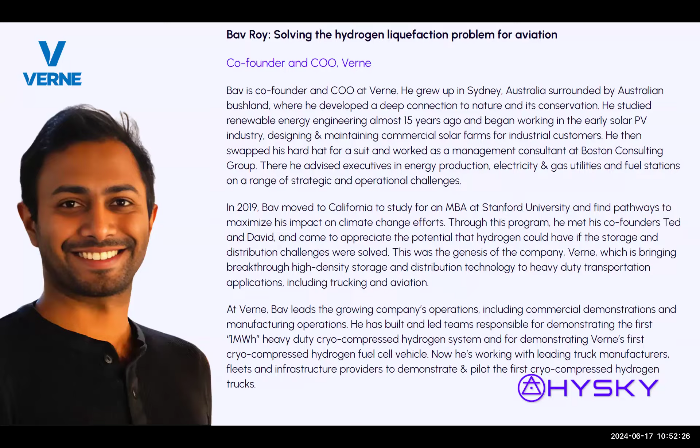Great, thank you Rishabh for the introduction. Can everyone hear me okay? Yep, thumbs up, okay great. And Danielle, congratulations on the twins, that's huge news. Thank you everyone to the HYSKY community for tuning in today.

It's a pleasure to speak with you about what Verne is working on. We're named after Jules Verne, who talked about hydrogen-powered shipping actually well over 100 years ago, so he was a bit of a visionary. But let me see if I can get my presentation sharing here.

So what Verne focuses on is high density hydrogen for heavy duty transport. A little bit about me - I lead a lot of the operations and early commercial demonstrations at Verne. Originally worked in the solar industry in Australia, then as a management consultant, before moving over to California to focus on bringing novel solutions to climate change, and saw a lot of potential for hydrogen to have a role across the landscape, but especially within transport, as I'll talk about today.

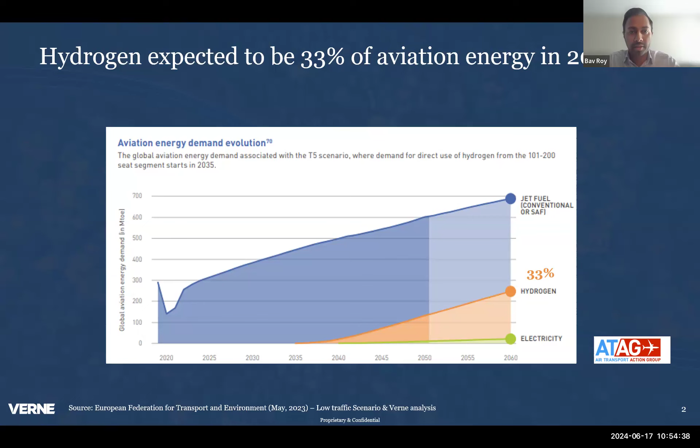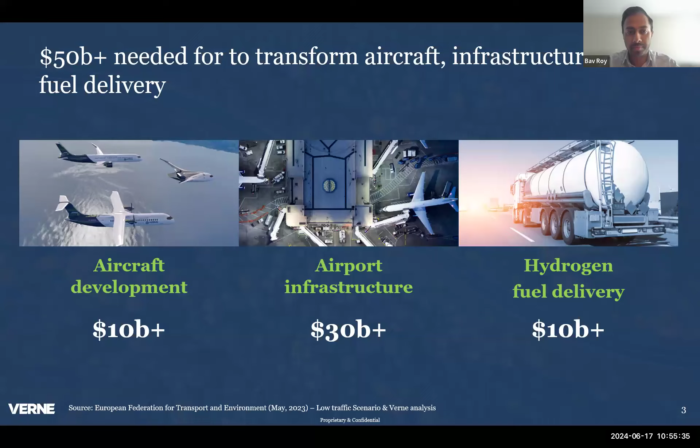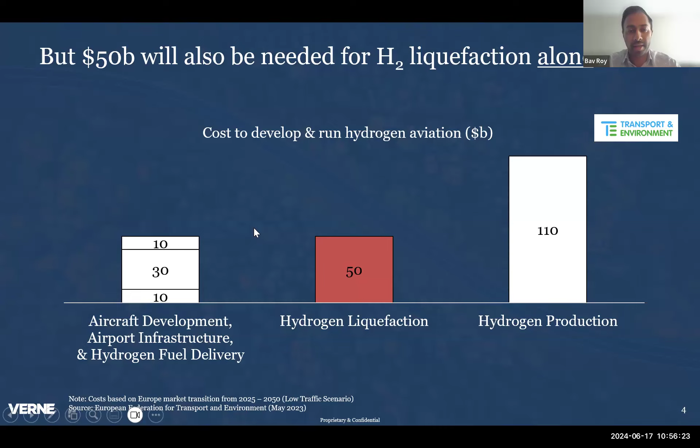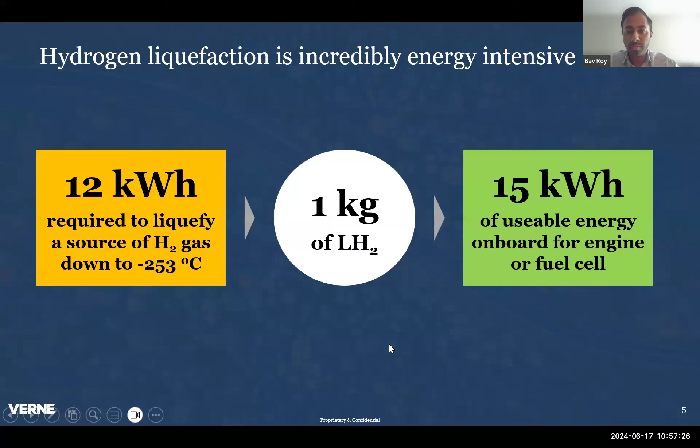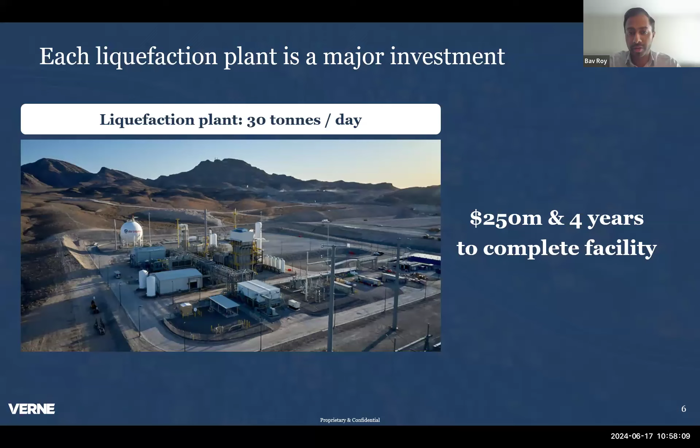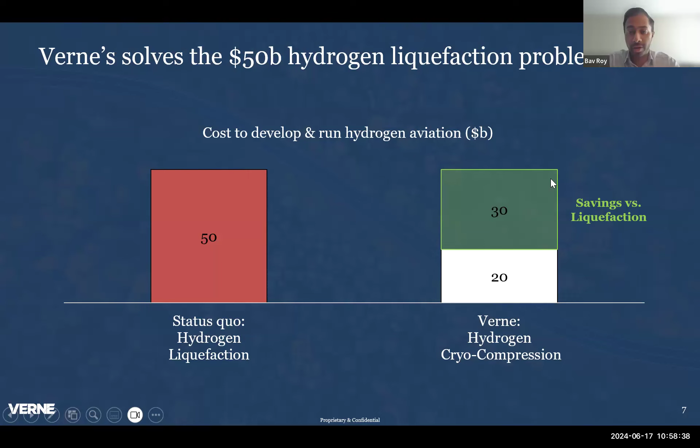So what Verne does is we solve the liquefaction problem. We think about the status quo that the industry is planning for, which is fueling aircraft using liquid hydrogen. That's going to cost about $50 billion. However, with cryo-compressed hydrogen, we can bring that cost way down to a more modest $20 billion, providing $30 billion of savings that can be used for some of the other challenges on aircraft development, infrastructure, fuel delivery, or even production.

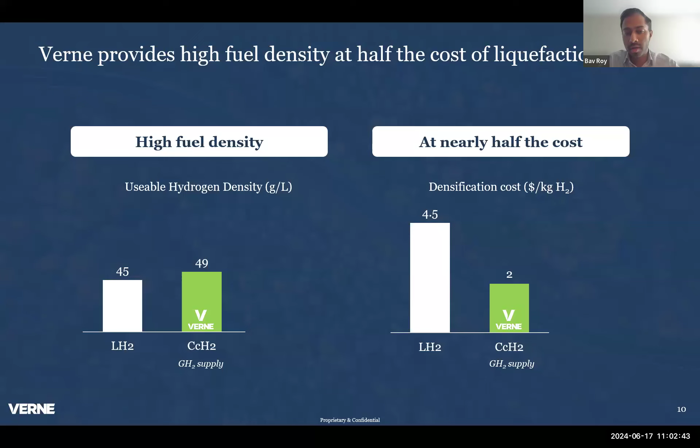But as I mentioned, you can still use the liquid hydrogen supply chain if you happen to have a great low-cost supply of liquid hydrogen. So you fill the same cryo-compressed hydrogen storage systems on board aircraft using a source of liquid hydrogen supply, and you are able to get to much higher usable densities, because that cold gas is even colder if you start from liquid hydrogen than if you start from gaseous hydrogen. So you're able to get to much higher usable densities than cryo-compressed from gas and also than liquid, but you don't get any of the fuel cost savings that you would if you skipped the liquid hydrogen supply chain.

So what this means is aircraft developers now have flexibility. They can design for cryo-compressed hydrogen storage on board, knowing that in every scenario it's going to be the highest usable density, and in supply chains that have gaseous hydrogen supply, the aircraft can benefit from lower fuel cost. And for supply chains that have liquid hydrogen supply, the aircraft can benefit from even higher usable density.

I thought I'd touch briefly on the concept of usable density, because often we hear that liquid hydrogen's actual density is 71 grams per liter. That is true for liquid hydrogen stored at 1 bar. The challenge is you can't actually store liquid hydrogen at 1 bar on vehicles. It's often stored at slightly higher pressure, and what that does is bring down the max fill density to unfortunately lower densities than 71 grams per liter.

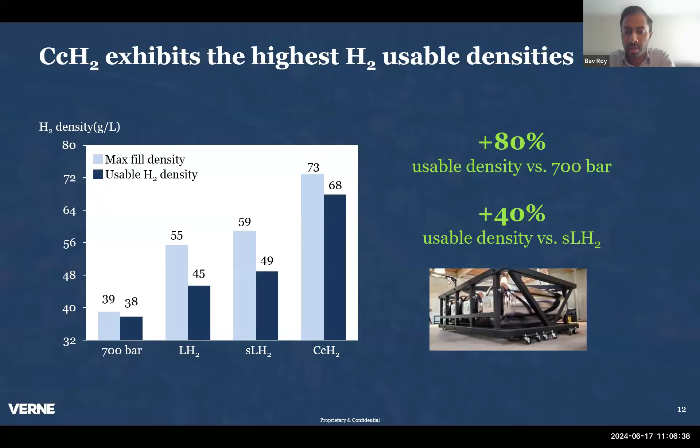So we often think about these systems as storing cold compressed gas, and that often creates the question of, well, that sounds pretty expensive. It's got to be pressure compatible, temperature compatible. However, because we're able to get to such high densities, and we're only sticking to 350 bar hydrogen, which is a lower pressure than what, say, a Toyota Mirai has today, we're actually able to get to lower storage costs than even compressed gas. We expect to get about 50% cheaper than 700 bar, simply because each storage tank has such high density that you have fewer tanks to store a given amount of hydrogen. There's less carbon fiber, less valving to store the same amount of hydrogen.

We verified this with our own internal analyses as well as some third-party analyses from Argonne National Lab and a couple others.

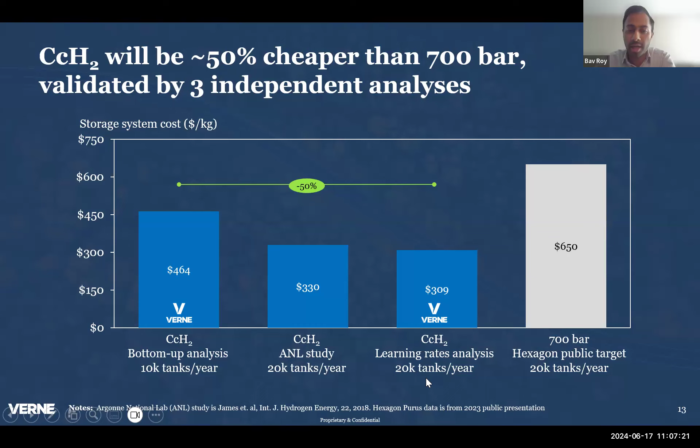So what does Verne do? We have 2 products. One is the cryocooler to compress and cool hydrogen to increase that density. Here on this pallet is a 1 ton per day cryocooler that we tested in Arvada, Colorado. And then on board vehicles, we provide the storage systems - the vessels, the control systems, the balance of plant heat exchangers to store hydrogen at that highest density. And that's all with passive insulation, so insulated storage tanks.

The benefit for aviation is that on the cryocooler side, rather than these massive liquefaction plants that will take many years and hundreds of millions of dollars to get set up, these cryocoolers can instead be deployed - they're efficient, low cost, and modular. This can be done at 1 ton per day, and it can also be scaled up. On the storage side, we've got high density, lightweight storage systems that are at supply pressure, so they're compatible with ICEs as well as with fuel cells.

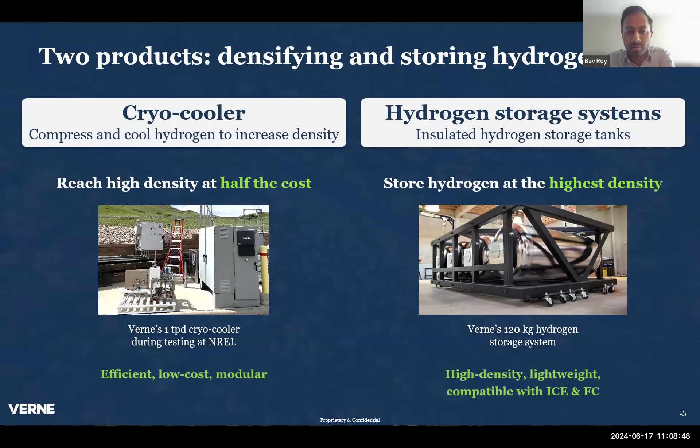So this is a new state of hydrogen, right? We've got gas, we've got liquid, and we now have cryo-compressed.

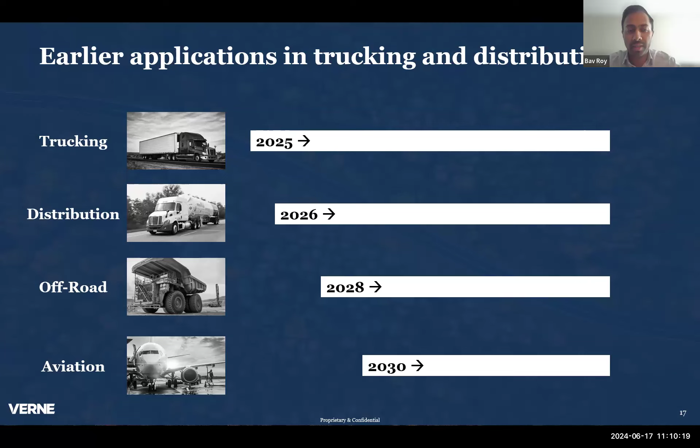So I'll now touch briefly on some of the work that we're doing in trucking and distribution, and how that leads to some benefits in aviation.

As I mentioned, two applications in the near term: trucking and hydrogen bulk distribution. For onboard storage on trucks, we're able to maximize the usable hydrogen on board. Because we're at such high density, we can store enough hydrogen exactly where the diesel tanks are on trucks today. We'll actually be demonstrating the first ever cryo-compressed hydrogen truck later this year. We've already powered a fuel cell vehicle with cryo-compressed hydrogen, and as I mentioned, we're working on powering an engine this year.

These storage systems are compatible with both liquid hydrogen and gaseous hydrogen supply, as I mentioned earlier. And that's really important for truck fleets that don't want to adopt a fuel unless they know that they'll have fuel security - that wherever their tractors go, they'll be able to actually fill up. That's one challenge that we saw with LNG in North America, and why it didn't really take off.

And then there's low boil off at both the station and vehicle side. Today the liquid hydrogen supply chain, unfortunately, just due to the tricky nature of liquid hydrogen and it needing to be stored at such cold temperatures, does suffer from a lot of boil off losses as hydrogen is produced, transferred over to trailers, and then moved from trailers to stations. With cryo-compressed hydrogen, we're able to minimize that boil off throughout the supply chain.

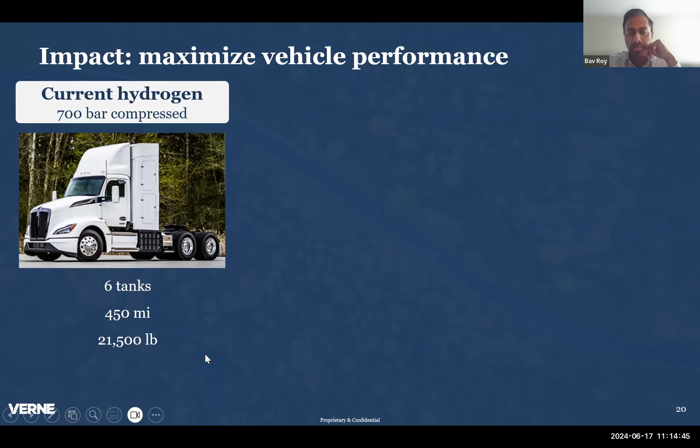For comparison, the equivalent diesel truck weighs about 16,500 pounds, so that's a meaningful hit on the payload that truck can carry, meaning less revenue for the fleets. So that's the 700 bar truck. With cryo-compressed hydrogen, we're able to provide substantial benefits to either increase the range or lightweight that truck.

Starting with a long range option, in that same region we could store four tanks to about double the hydrogen on board and double the range without impacting the weight. What that means is that can halve the infrastructure requirement for trucks, because they can always come back to fuel at their same home base.

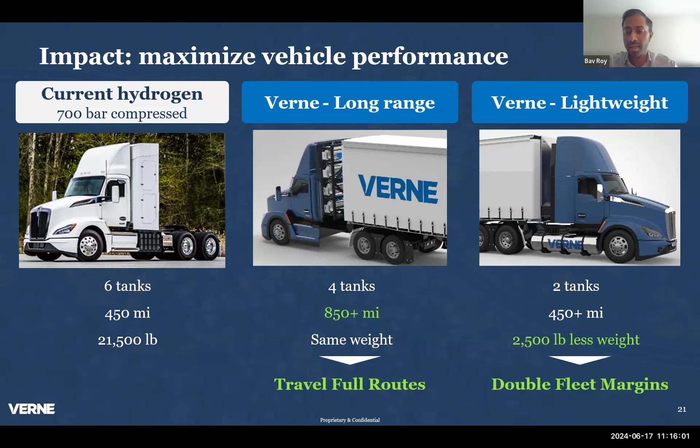And on the lightweight option, we're seeing a lot of traction for this, particularly in drayage and other applications, where we can completely avoid this backpack. Instead, store hydrogen in two saddle-mounted tanks either side, to get to at least about 450 miles or more range, whilst bringing down the weight and shortening the wheelbase of this truck. That can potentially double the fleet margins for payload-constrained fleets that already have pretty tight margins on their operations and really suffer from any hit to their payload carrying capacity.

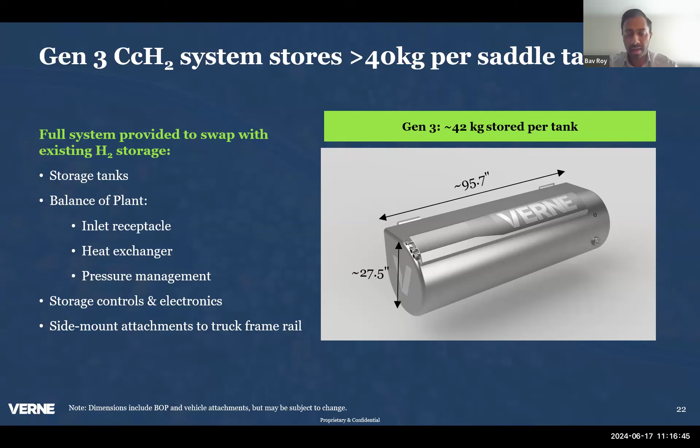So this is a 3rd-gen system that we're working on, designed to sit behind on the side of a truck. It stores about 40 kilograms, and it's designed to be a direct swap-in with existing hydrogen storage. It includes the storage vessels, the balance of plant, inlet receptacle, heat exchanger, all the pressure management equipment, as well as the controls and electronics, really to make it an easy one-for-one replacement without needing to think about what a fuel cell or engine sees, because the fuel cell or engine will see exactly what they see today with compressed gas storage on board.

So we've talked a lot about the on-vehicle side. There is an established liquid hydrogen network in North America, and we also want to maximize our compatibility with that. Here, what I'm showing is the existing liquid hydrogen to compressed gas supply chain. Some of the new hydrogen stations being built will have a liquid hydrogen tank, a cryopump that essentially converts liquid hydrogen to compressed gas, then a vaporizer to heat up that cold compressed gas, buffer storage, and then a dispenser hose and nozzle to fill these compressed gas trucks.

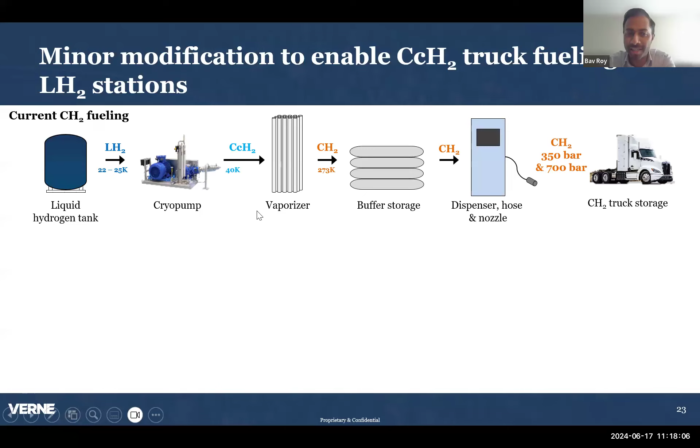And actually in this dispenser, you'll have a chiller unit to chill that hydrogen to -40 Celsius to prevent the tanks from overheating. So funny enough, in this process, you actually already get compressed hydrogen immediately after the cryopump. However, because there's been no technology to store cryo-compressed hydrogen gas, the hydrogen is heated up, and that really high density, that cold energy, is wasted. It's quite unfortunate.

So what we're doing is working with a number of station developers to ensure they can essentially dispense cryo-compressed hydrogen as well. And it's actually really easy to retrofit. You just bifurcate the line and keep that hydrogen cold out of the cryopump - it's already in the perfect state to fill these trucks. We've actually recently announced some testing we've been doing on the nozzle and hose for cryo-compressed hydrogen. So all we need to do is out of that cryopump, keep it cold as we fill these trucks.

And I guess the same thing applies for aviation, in that if, as we expect there will be, you're already planning to have at least some of this equipment, we could just reuse the same liquid hydrogen tank, same cryopump to fill these trucks, or fill cryo-compressed hydrogen for aviation.

And of course, like I mentioned, this is the liquid hydrogen side. There's of course the low cost alternative if you want to use the cryocooler to just bring down that fuel cost, by using the gaseous hydrogen supply chain and a cryocooler that will chill that pressurized hydrogen.

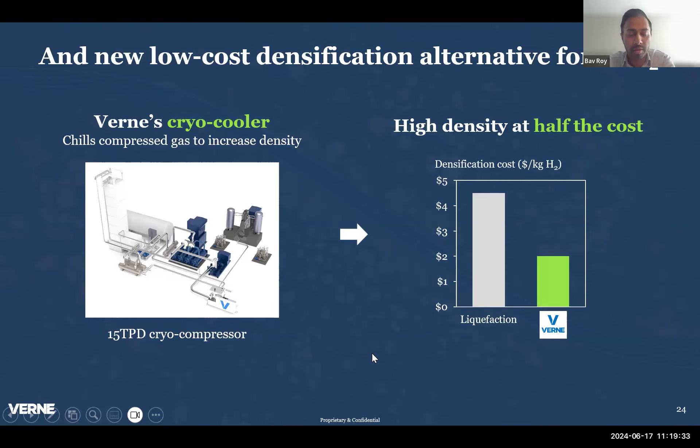So in summary, there are multiple ways to fill any sort of cryocompressed storage. You could use the liquid hydrogen supply chain and a cryopump, or the compressed gas supply chain and a cryocooler. And worst case scenario, since these are 350 bar pressure vessels, if you were stranded with no source of cryocompressed hydrogen, you could fill with 350 bar hydrogen. That's not something we'd recommend because it's not as efficient as even a standard 350 bar tank, since you'll have extra insulation and other components.

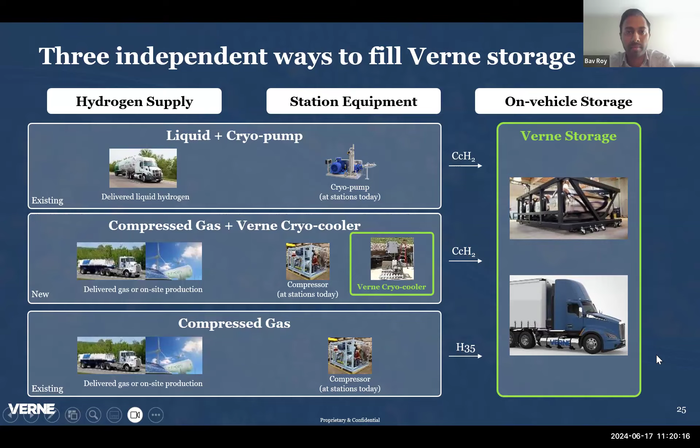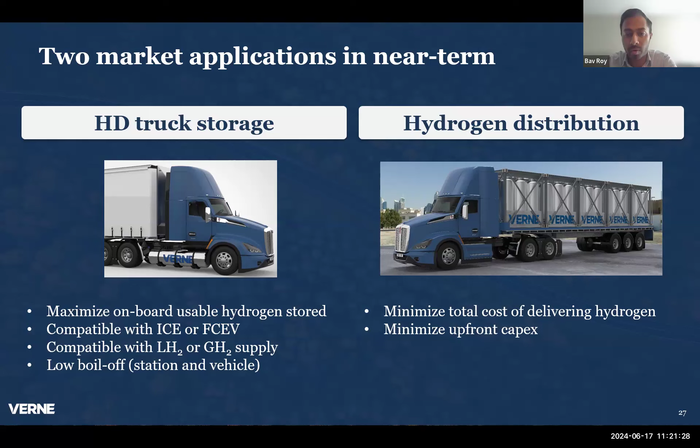So as a summary, in the near term we're mostly focused on trucking and distribution, but we're excited about how cryo-compressed hydrogen can have a role in aviation. And then on the distribution side, briefly...

What cryo-compressed hydrogen trailers can be filled by is, one, using the liquefaction plant. You've already invested in a great liquefaction plant, you can still fill these trailers using that cold compressed gas. But if you don't have a liquefaction plant, you can instead put in the cheaper compressor and cryo cooler to still fill cryo-compressed hydrogen trailers. It just won't quite be as cold as if you use the liquid supply chain.

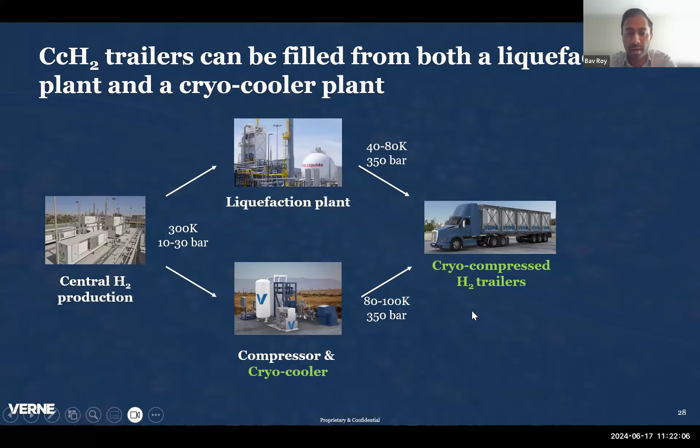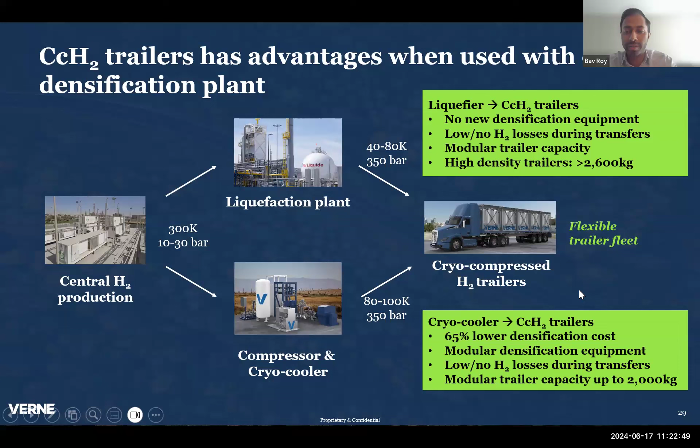And so each of these has its own benefits. Using cryo-compressed hydrogen trailers with liquid supply means you can reuse the equipment, you have a lot less losses during transfers, and it's modular trailer capacity—you don't need to just deliver one big liquid hydrogen tank, you can scale it down as required. And on the cryocooler side, as I mentioned, it's much lower densification cost. You can roll out your densification equipment in a much more modular way, and you still benefit from having low or no losses during transfers.

Okay, so just a bit about our team. You've got myself, the Chief Operating Officer, on the call. We're also led by our CEO, Ted, and our CTO, David. And then we've got some experts from the hydrogen industry. Kaushik Malik, the former CTO at Steelhead Composites, has really been a pioneer of pressure vessel technology over multiple decades. We've got Vincent Helwan, who spent decades at Air Liquide in cryogenics, and then developed a helium cryocooler at the Stanford Linear Accelerator. And recently Alex Grab has joined us from Nikola, where he developed the onboard hydrogen storage systems, and previously used to work at Luxfer.

And on our advisory board, we've got Tom Linebarger, the former CEO of Cummins, really helping us think about how we can develop a trusted brand and manufacturing process similar to what Cummins has, as well as Salvador Aceves, the original inventor of cryo-compressed hydrogen and former group leader at Lawrence Livermore National Lab, where we've done a lot of our testing to date.

We're grateful for a lot of the funding we received from Breakthrough Energy, ARPA-E, Department of Energy, and recently we got a US Army grant as well. And then private capital—we've got investments from United Airlines, Trucks, as well as Amazon and Caterpillar.

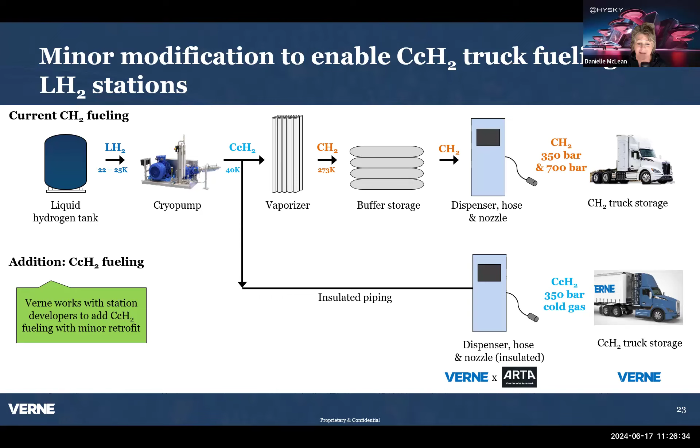I see. Well, I hope I get an invite to your demonstration. Would love to bring some aviation folks with me to see it. I think this is a game changer. Absolutely. There was one more thing I wanted to ask you, and then we'll get to the questions in the chat.

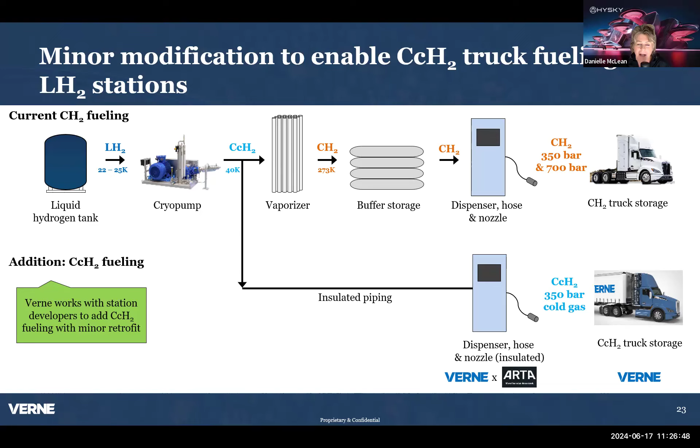But what do you say to the majority of the hydrogen aviation industry—or I guess I should say group and developers—there's a really general consensus that it has to be liquid hydrogen on board the aircraft. You explained the density of cryo-compressed. What do you say? Do you get that comment a lot? I hear it all the time. What do you say to that?

Well, I guess I would start by agreeing that it has to be really high density. That's why everyone suggests it needs to be liquid on board, because compressed gas just won't get there for aviation applications. I'd say let's look at the economics of aviation today. Fuel cost is potentially the biggest driver of the economics. If we look at the cost of liquefaction, it is going to come down, but there's going to be a limit as to how far it can come down. If it's anywhere near the cost of what it is today, I'd love to see how hydrogen aviation can be economical. So instead, what cryo-compressed can offer is slightly higher densities than liquid, without the major fuel cost penalty.

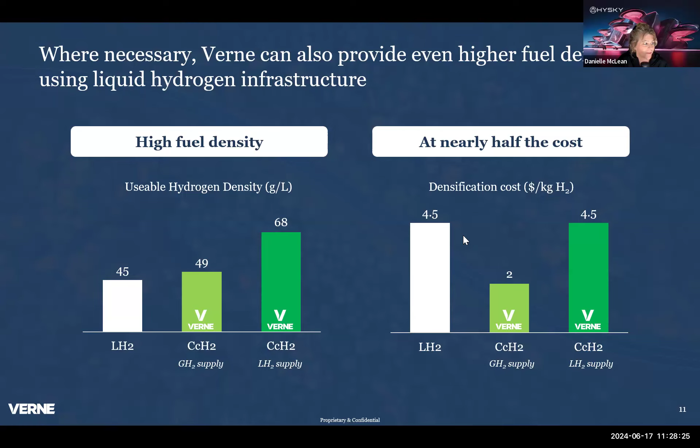I love that. I'm really excited to work with Verne and see where this technology goes. It seems really smart. Okay, thank you.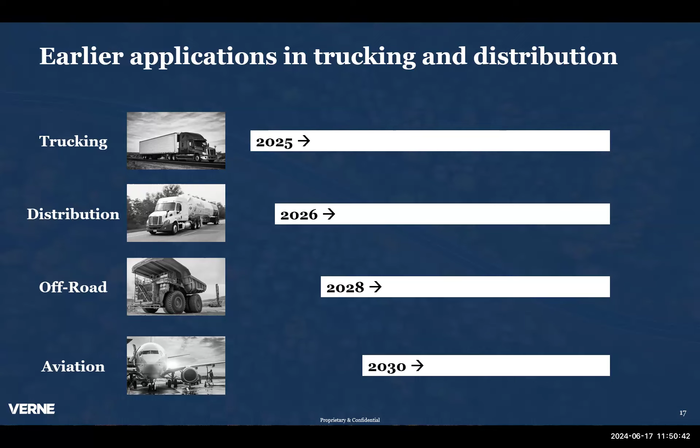Hello? Can't hear you. Classic. Sorry, I thought I'd get through this without doing that.

I can't disclose, unfortunately, a lot about discussions with the manufacturers. All I can point to is one of our public announcements, a collaboration with ZeroAvia to explore cryo-compressed hydrogen for aircraft and airports. We are talking to others as well, but unfortunately can't disclose that. Okay, well, thank you. Yep.

Rich Holloman, speaking of ZeroAvia, and you might have touched on this already - how does cryo-compressed compare in safety to alternative hydrogen tech? Rich, you can come on and ask that if you'd like, even though I already asked it. You can come on and say hi and introduce yourself if you like. I'm not sure if he's still on because we're getting into the final stretch of the meeting, but you kind of answered that already, I think.

Yeah, happy to expand a little more. So generally we compare safety relative to compressed gas. As I mentioned, it's already a safe pressure vessel, and then you have extra insulation around it that also provides a safety barrier. And because there's a vacuum layer, you're able to very quickly and more accurately detect any sort of leak. We do have a metallic liner inside the pressure vessel, which also provides additional safety benefits relative to the polymer liners used in Type 4 pressure vessels.